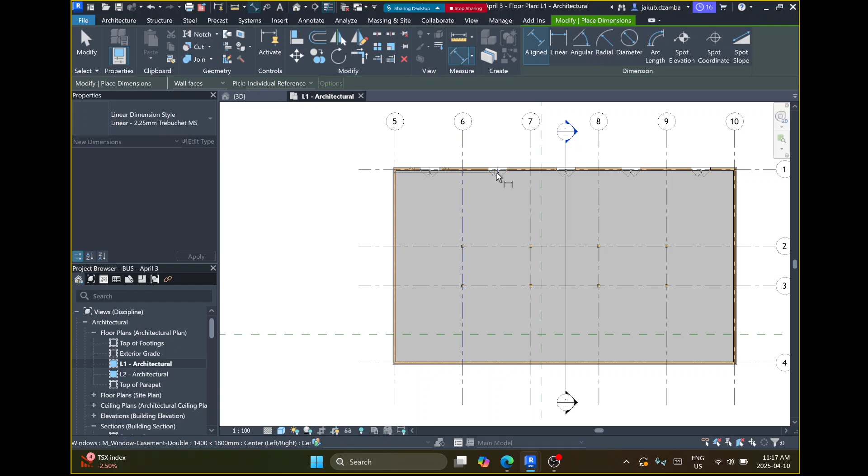That's a very large window, I must say. So 2 meters is not the width. Yeah, 2 meters is the width, I guess. So then, I made 2 meters width, otherwise the distance of the window is... yeah, I know. And did you see the door goes full floor to ceiling? Oh, like it's ridiculous. Okay, we made 2 meters width because this was...

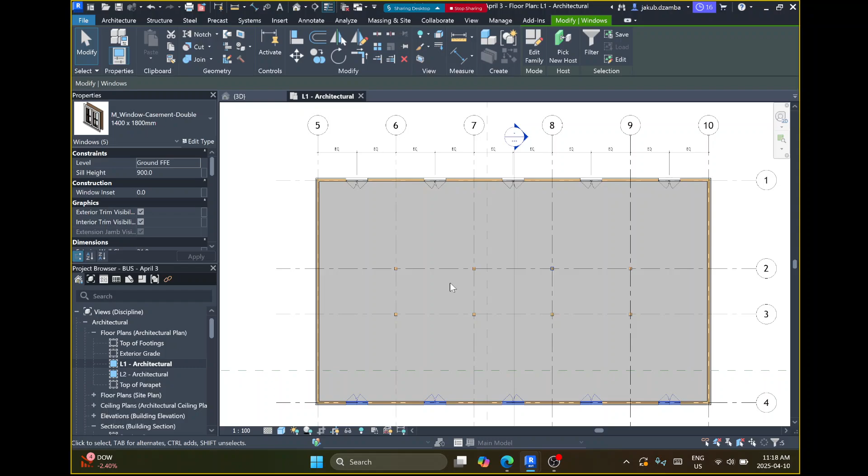The door has a specific measurement though of 2.2. Also, who the fuck just has a square door that is 2.2 meters in both directions? What use is that? You need to move 2 fridges through it simultaneously. And 2 of those doors. 4 fridges. It's like if it was a truck loading dock, that'd be one thing, but it's ground level. That's a fair point.

There's also only 2 windows. So yeah, I'm not sure what you guys have in your layout, so I'm just throwing it random. It says, at your discretion, provide 2 windows, 2 meters by 1.6 meters on the east and west side.

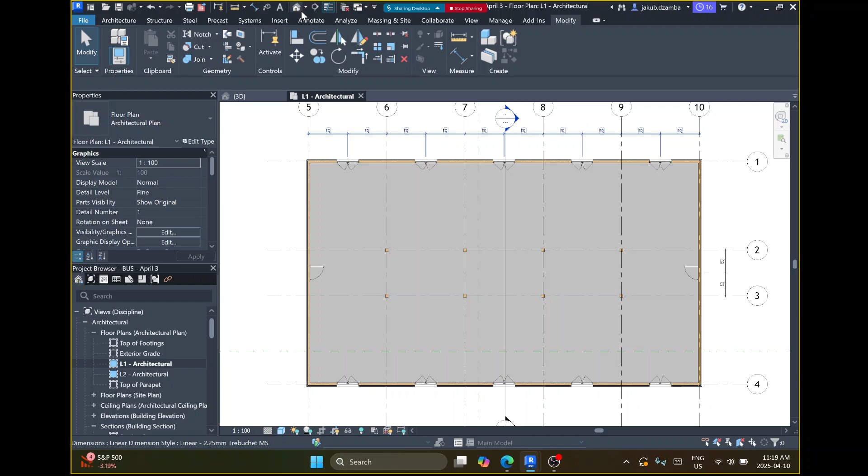Duct, yes. So I think we will hang that at the end. So I think we would hang it off of the bottom of the joists. We would load some kind of metal hanging, some kind of strapping or something like that, and hang the duct every few meters, wherever it needs to be hung under the joist.

But I don't think there's any other room to place it. You can't place it above the joist because your roof is there, and placing it between the joists is fine for any runs going the short way through the building, but you're gonna need to deliver air lengthwise through the building. I don't think you meant like the duct, like a pipe, just take a cut.

Oh, he just wants an opening. So would you like me to show you how to put an opening into the wall? Okay, well I know how to do that. You know how to do it? But like, I made a window this side. Kind of small, I think it's more. Sounds good. If you want, just for— I don't think we actually need a duct, I'm pretty sure it's just the opening. I'm pretty sure we can just shove a hole, shove a fan. Okay, that's just accidental, make something.

Give us a section. So to cut an opening into a wall, I'm just gonna go to an elevation here. East elevation, doesn't really matter which one.

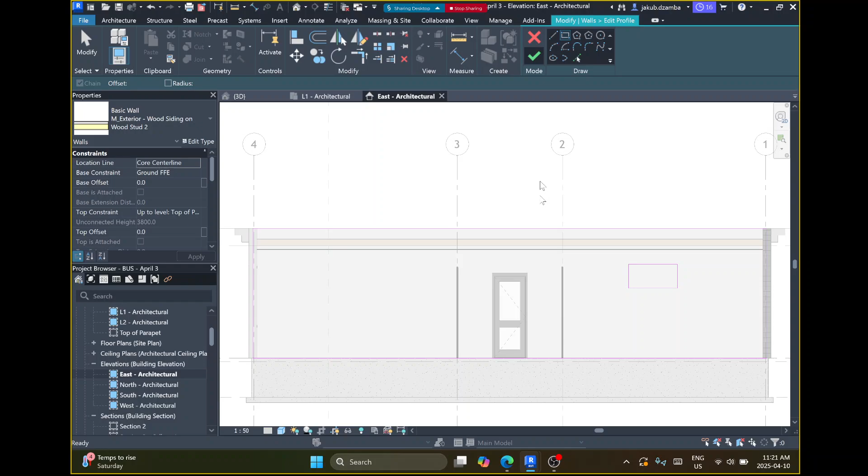I'm going to do 1.4 by 700 millimeters. Hit the check mark, and now I have a cut in my wall. So you can easily do that anytime you want, any shape. You can edit it later just by clicking it. So that's how you can do that.

I know we have a lot of time, but I just don't want to be caught at the end where we can't get it done. So should we move on? Are we okay with openings, doors, windows, and other stuff?

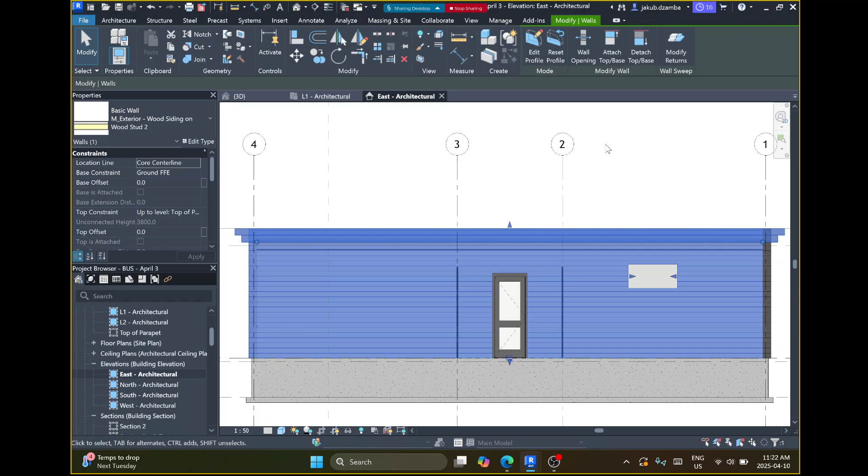Okay, so then let's progress right away to the wall section. Okay, so we're going to focus on doing... let me open it up here.

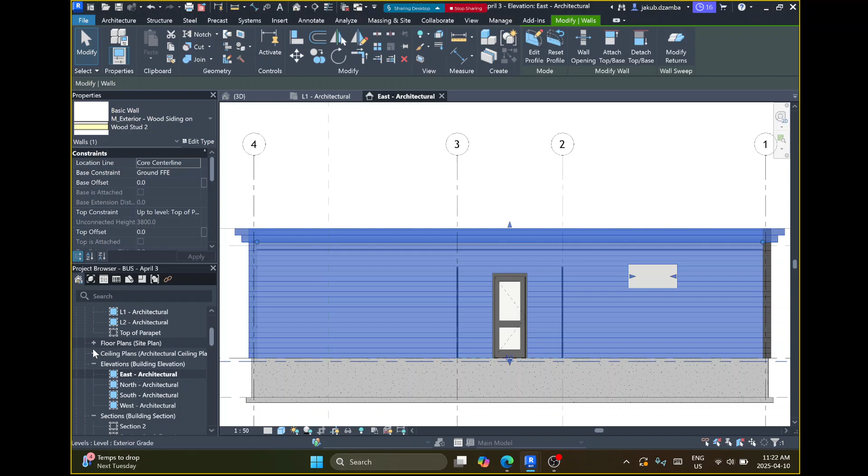Okay, there we go, so we want to get this part done. First step, I'm going to go to my drawing, go to sections, building section, and it's this part of the wall that we want to do.

Now let's say this is gone, I'm going to delete it. That's okay, delete this. Now I want to make a section out of this part, so I need to do a callout here, which will give me a little bit more detail of that part of the building.

What I'll do is go to, I think it's under view, right next to section there's a button called callout. I'll hit the little arrow under it, get a rectangle, and outline what I'd like in my detail or wall section.

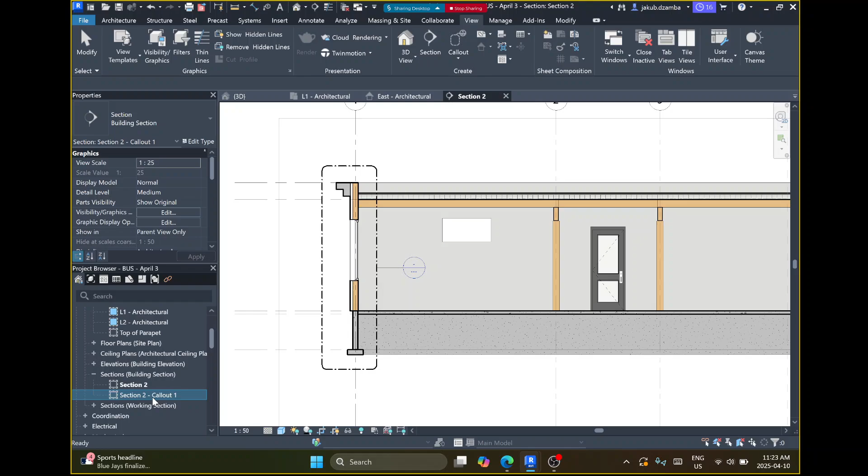As soon as I do that, it makes another tab down under section. I can double click it and get my wall section. Once I'm in here, I can go to fine level of detail, thin lines, all that good stuff.

I'm going to extend my datum lines a little bit just so they're not overlapping, and otherwise this gives us a pretty good start for modeling the rest of it. So let's start—I think we should start at the footing.

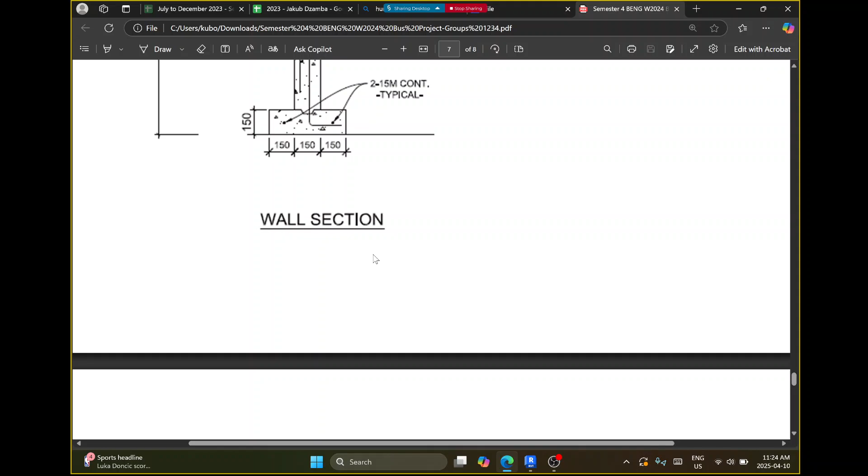Okay, whoa, that's too much. Sorry, there's a bit of lag on this computer. Not what I wanted. Here we go. Yes.

Okay, let's go back to Revit. I'm going to switch to hidden line now so it looks more like the drawing we're trying to create. Let's start really easy—down here we've got a bent line which represents rebar, so let's try adding that first.

I'm going to go to annotate—most of what we're doing now will be in annotate. I'll go to detail line, which is like a mini version of AutoCAD in Revit.

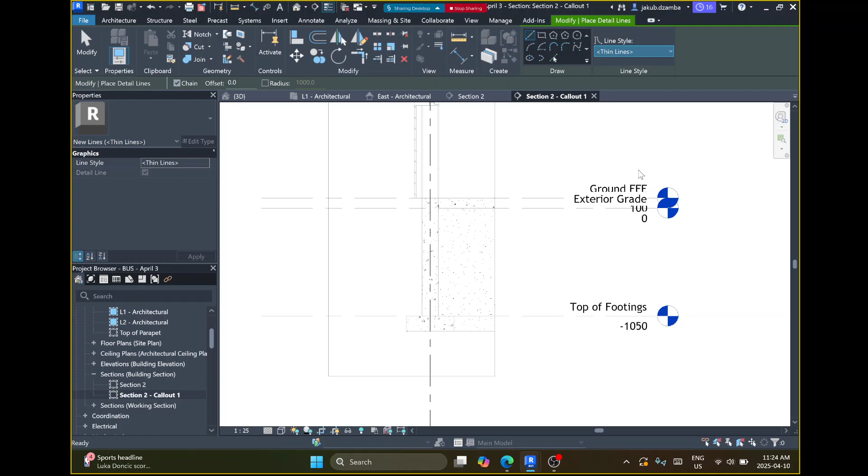So basically here I can click a line, and here I can say what kind of line I want—thin line, I think I want a medium, or is it a wide line? I don't know, you know what, let's take the thin line for now. And I'm just going to draw it from here to here.

That's it, I should be able to give it a fillet of some kind—trim, extend to corner. Okay, we can come back and work that detail out later. There is a fillet, an arc we can do to bend this, but in the interest of getting everything complete this class, we'll do what needs to be done, then come back and add details later.

So we have our rebar line in there, and now I need to point to it and say 2-15M continuous typical. I'm going to go here to annotate text, and grab the text with an elbow—the second one gives me a leader with an elbow. Here I can point on that, come out, come to here, and say 2-15M, something typical, continuous typical. I don't think it's a rebar size.

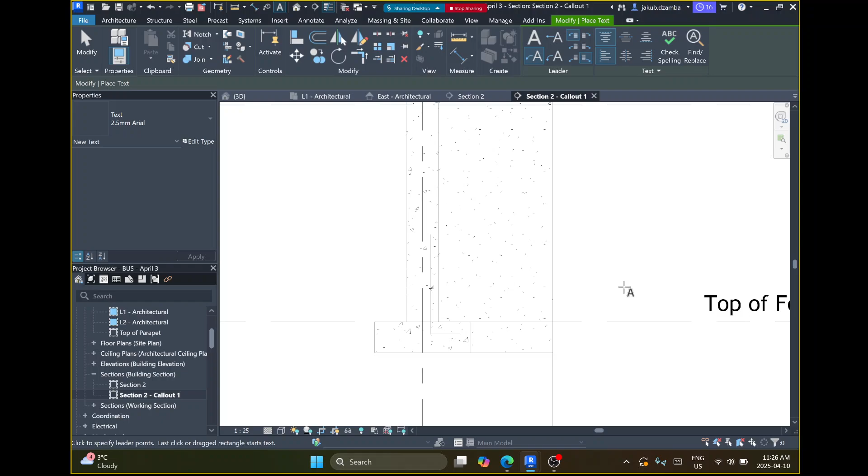That's not a rebar? It's like a metal pipe going inside the tube. Holy smokes, sorry, I guess computers making buildings. Sorry, can you say the comment again? It's just like in the wall section, if you open it from the middle—yes—there's like two metal things, like it goes through.

So I thought these were—so this is a rebar, you're right, there's two circles there as well. I believe this vertical line, this bent, and these two circles just represent rebar going this way. But I believe all of these are rebars, and I'm guessing they're all 15M thickness. Oh no, so here, 15M at 400 vertical, 10M at 300 horizontal, so there are horizontal ones in here as well. Now I'm just going to go back here and see why it's fighting me on placing text.

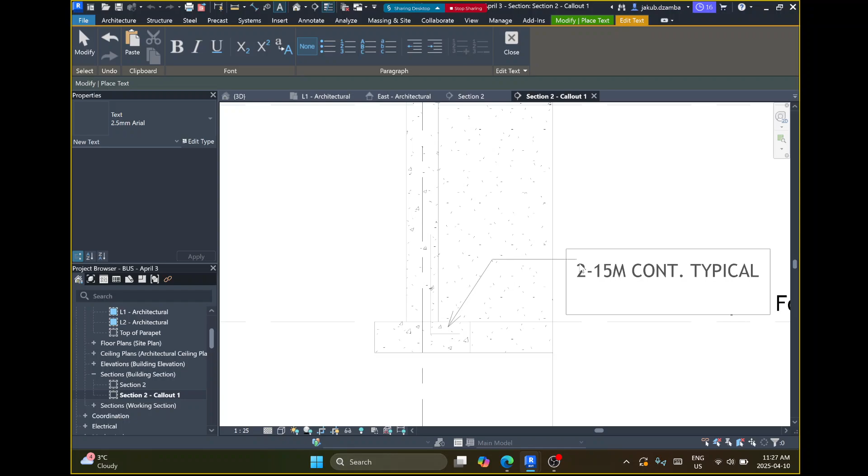Sorry guys, volume. None of the created elements are visible in Section 2 - Callout 1. You may want to check the active view, its parameters and visibility settings.

That's not good. Oh, there it is. I think it just wanted the drawing stretched a little bit more.

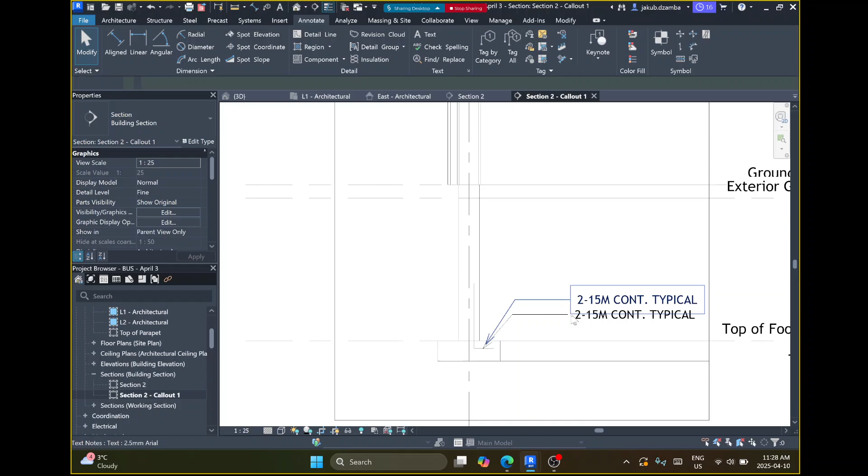Okay, so we have two of the same. I'm going to knock that out. I may want the text a little bit smaller, just so it's easier for us to navigate stuff. Wrong way, 1 to 10, maybe too much. 1 to 20, okay. So I have a line there. Let me just see if I can make it a fat line. That may make it a little bit easier to distinguish.

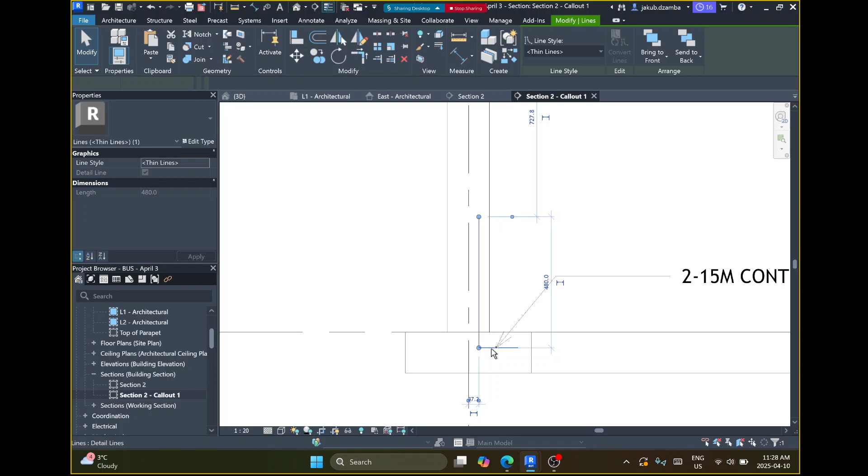There is a medium one option. Is there? Does it show up as such? I don't know how to change it to that. I think right here, so I changed mine to wide line, and it didn't do anything at first. It looked like this, but then I went up here and I turned thin lines off, and then it seems to give you a bit more differentiation. There you go. Yeah, okay.

So we have that, and now kind of more of the same. I'm going to go back to annotate detail line, and here we're kind of eyeballing it. It's okay. The structural drawings will specify specifically where these lines must go, where these rebar must go, so we don't need to be perfectly accurate about it. We're kind of diagramming where they go in.

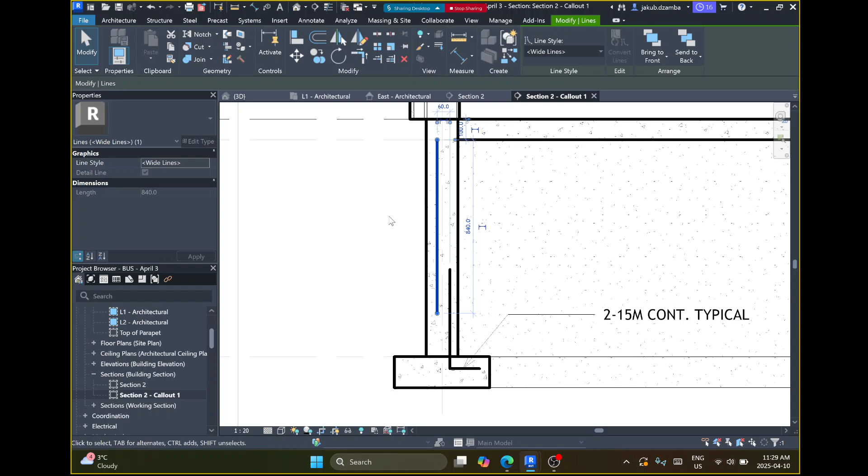We have two going horizontally.

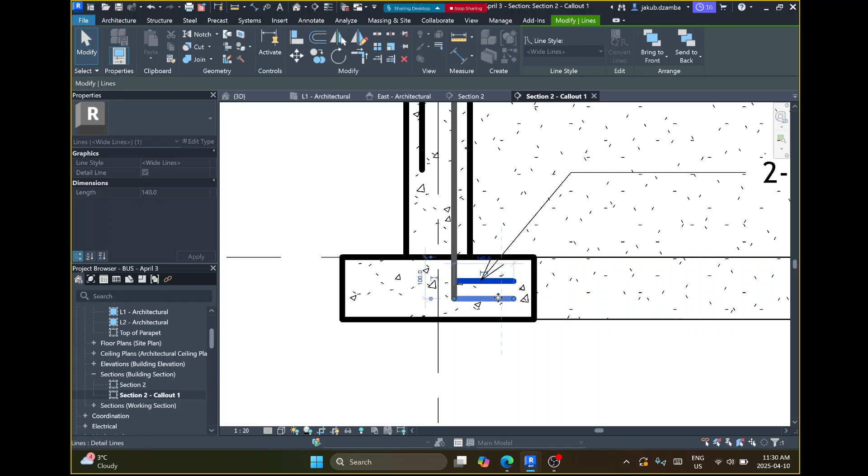Typically, I think if you do rebar, you'd want it at least 2 inches embedded in the concrete. So if you wanted to be very detailed about this, we could make sure this is at least 50 millimeters in and 50 millimeters away from any edge. You want the rebar to be 2 inches. I believe it's 2 inches is the rule of thumb to make sure the concrete has a chance to grip it.

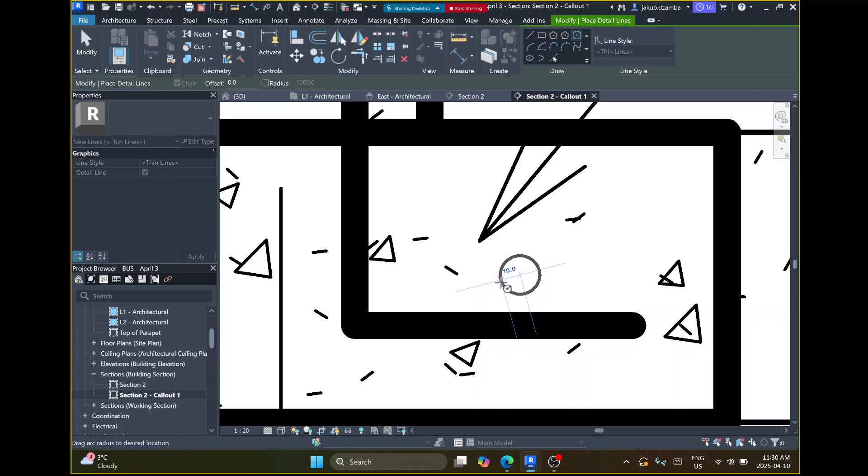And so here I'm going to grab a circle. That's a little bit big. Maybe I'll make it a bit smaller, 5 millimeter radius, and I'll make it a wide line. Okay.

Mirror. We haven't used the mirror button, but I'm just going to flip it to the other side. I'm going to use this button up here called mirror. Pick axis, and I'm going to pick this center line as the axis, and it should have flipped it. There it is.

Lots of angry sounds coming at me from this computer.

1, 2, 3, 4. It looks like they have at 300. Sorry, is it 300? Yeah, 300 millimeter horizontal.

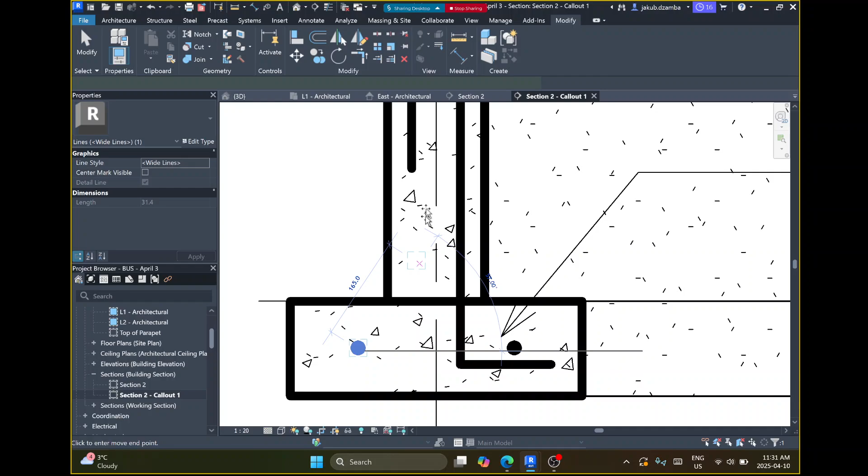So copy, somewhere here. Oh, I just drew it. I went to annotate, detail line, and I did a circle, and I just made it 5 millimeters in radius, because I believe the rebars are 15 millimeters wide, either 10 or 15 millimeters wide. So we're just representing it approximately.

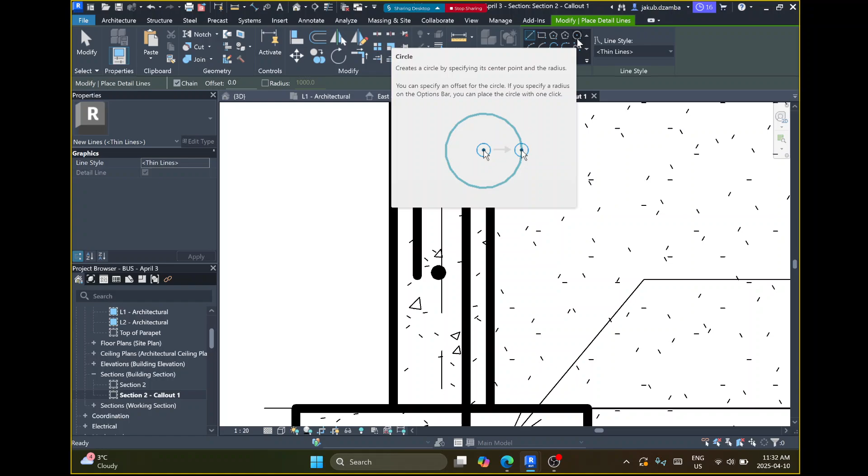Okay. Copy this guy. I'm going to move him 300 up. And 300 up again. And 300 up one more time. And then I can put in the second note, which says 150 foundation concrete wall, 15 at 400, 10 at 300.

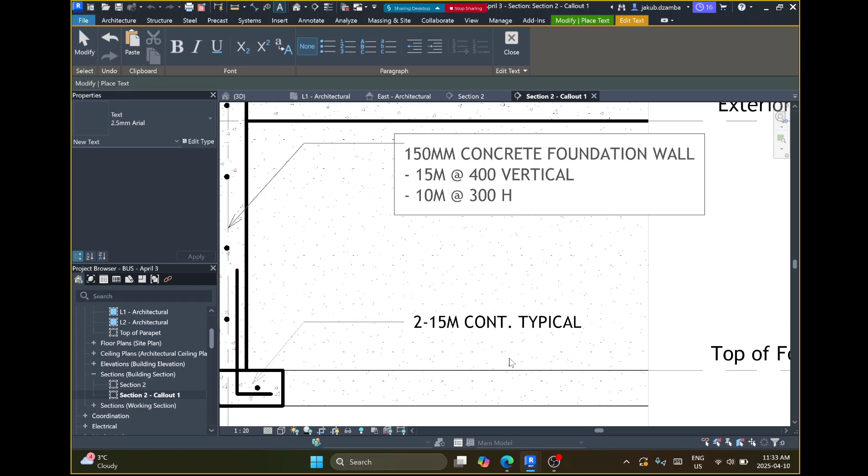How big are you making the circles? I just made them 5 millimeters in radius.

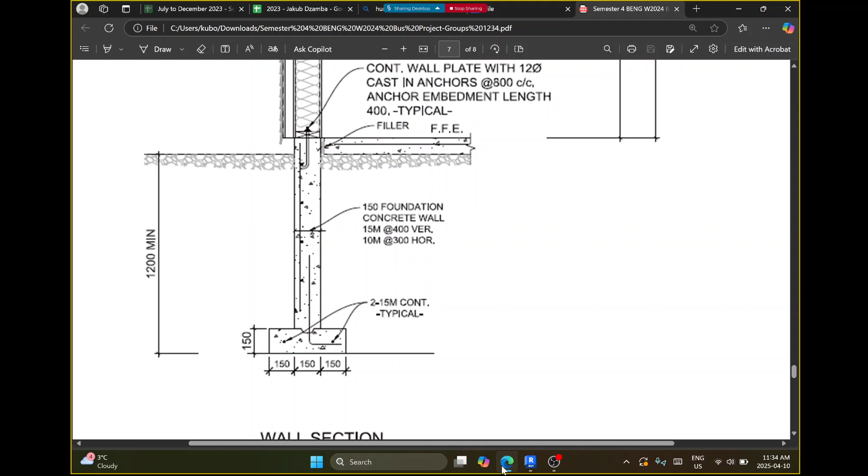No problem. I can walk around and give people a hand. Sorry, I kind of skipped ahead in mine, so if you get stuck on any part, just let me know and I'll head right over.

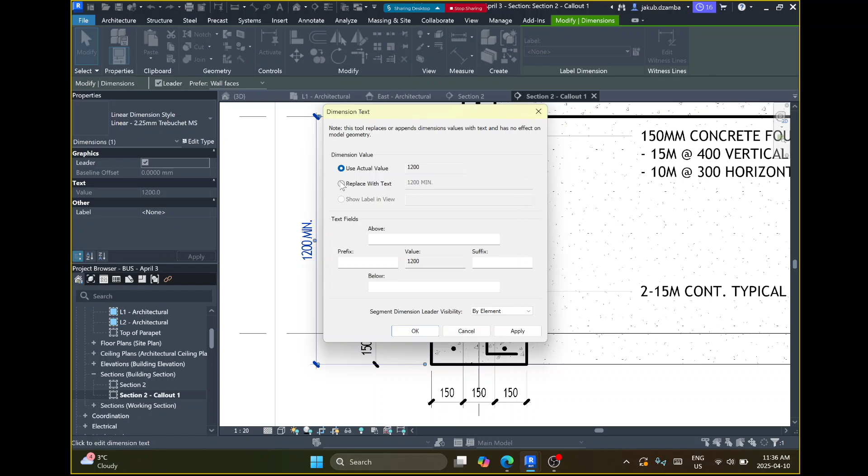Not sure this is coded correctly. Yeah, you got it.

I think if you have 4, you can be confident it's at least 3. But the note would be the thing that captures it more than that - the note would supersede the graphic in this case. So on site, if someone looked at it and thought they were closer together than 300, you would say no, the note says 300 on center.

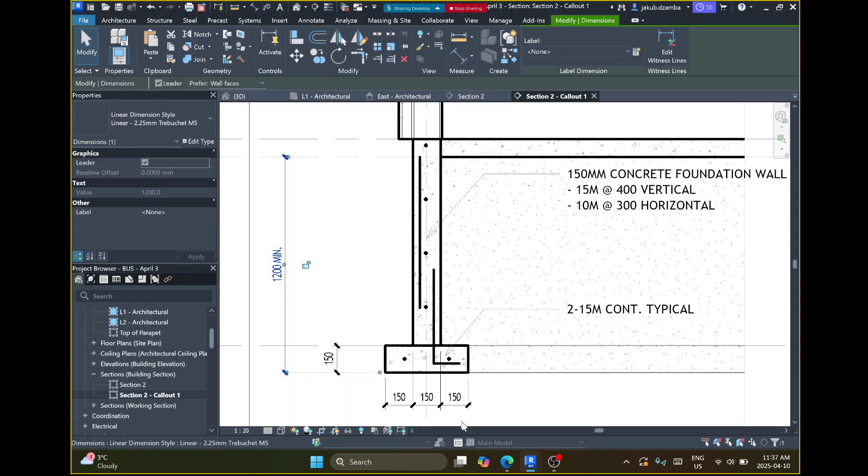Okay, in the interest of staying on schedule, I'm going to press a little bit further ahead. So we have some gravel hatching down here, then we have our floor. And what do we have in our drawing?

So we need to have a line for grade and do some hatching under the floor. They have their grade at 0, 0. So we will go to annotate, detail line. I'm going to make it a wide line - the grade should always be a wide line. So there we go.

And I'm just going to stretch my drawing a little bit to this direction. And now we need to do some hatching. So I think we can do that with the filled region. Just going to give that a try here.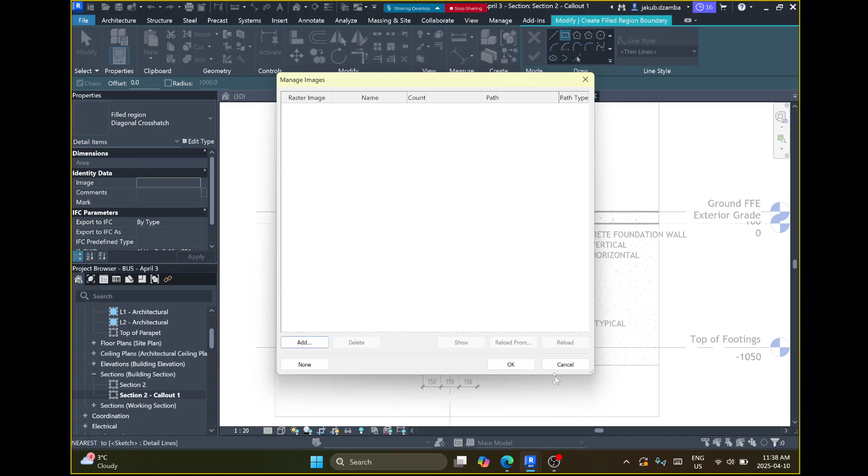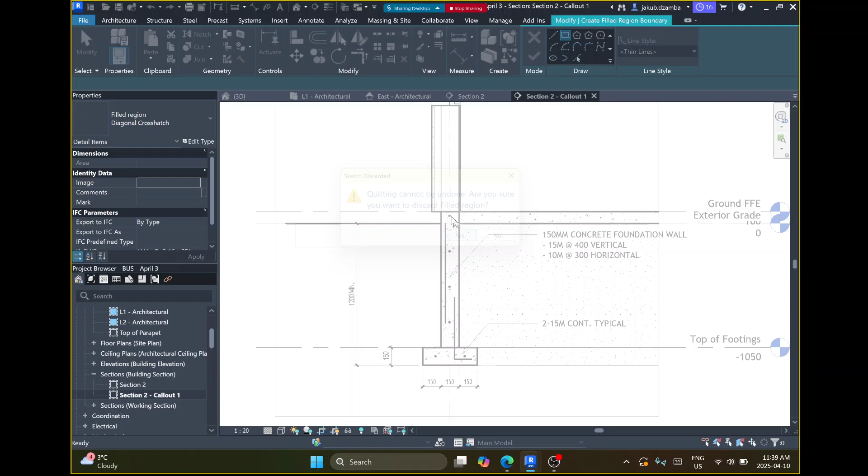Wood, vertical, horizontal, diagonal, up. So I'm on my laptop, I don't have all of the options, but if you guys can let me know. I'll do this command again in case you didn't see how I did it. I went to annotate, region, fill region, and then I grabbed a rectangle because I need to define the region I want to fill.

I'm just going to pick a layer here. And up here, it should let me pick what I want to put into there. Now, I don't have the gravel hatch, so I did diagonal lines down, which is not correct. But on your computer, I'm just wondering if you have it. Do you have gravel?

Edit. I didn't, I just have the diagonal hatch. So I'm just trying to modify it now. How did I get that? I think I know how to fix it, by the way. Okay, I'm going to delete this and I'll do it one more time.

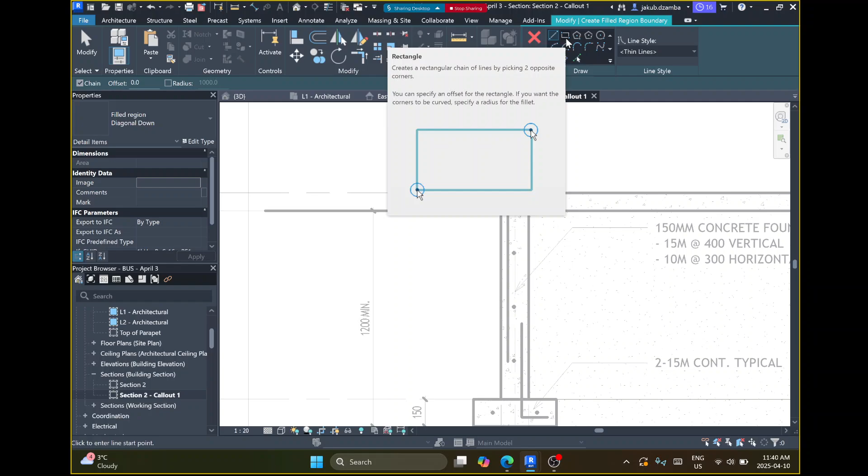So region, sorry, annotate, region, hit the little arrow, filled region. So far so good? My drop downs are different than yours. Oh sorry, well I think you logged in, you can press insert and then from the cloud you can download the file. Are you okay? Did you find it? No, it's now stuck.

So I think I suspect there might be a few more options here, let me give it a try. So filled region, rectangle, there we go. Edit type. And I think in here they give us more, but I don't see... oh I do see, I see concrete. Come on, gravel.

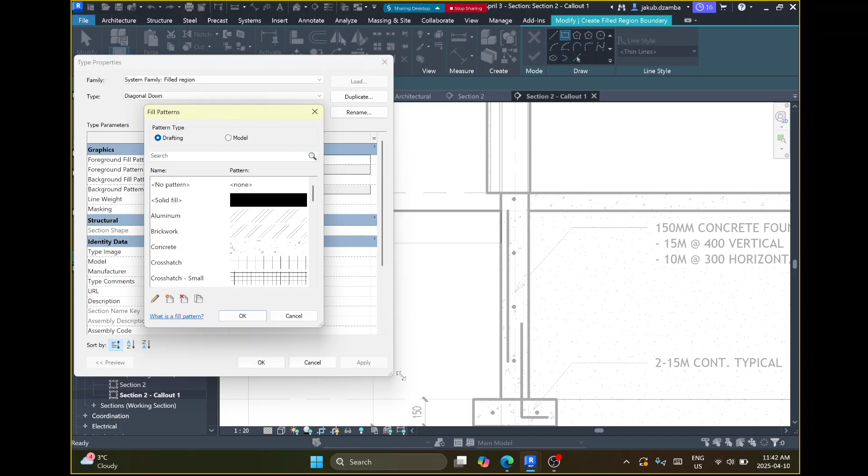Would sand be correct? You may have to go with that. Why do they have gravel on the outside? Hold on, that's not supposed to be gravel, it's supposed to be earth. Okay, so what we're going to do right now is plug in earth because I'm going to make a decision, and I'm not going to follow the drawing that they're showing us in one way. This out here should not be gravel unless you have that in your design. Most likely what they meant is earth. So we're going to fill this part with the earth hatch.

And later on, if we have time, we will come back and throw in a gravel hatch down here. But I don't think it's the end of the world if you don't put it there. We can always load that later on using the same method. So I'm going to go to earth, apply, okay, and hit the check mark, and I'll see what it gives me. Not bad. I may want to rotate it - typically you would rotate it 45 degrees.

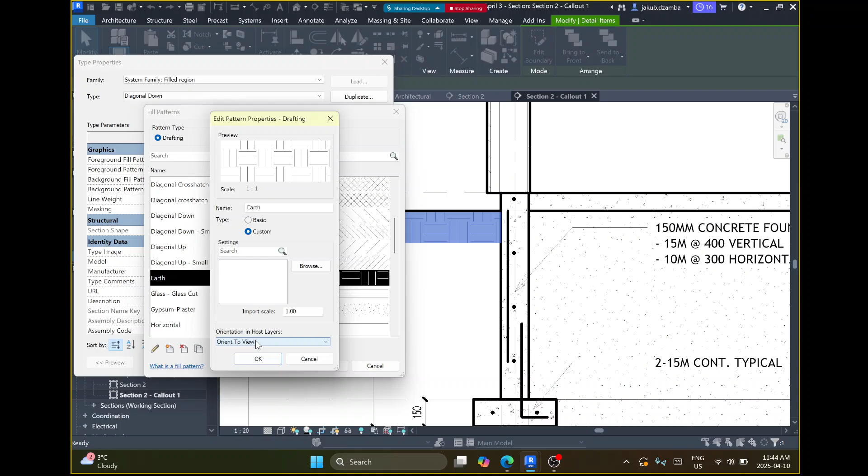So I'm just going to go back into here. Doesn't give me the option. Maybe it does, edit. No. Orient to view, import scale. For the inside one, do we use the sand? Sure, you can use sand. Sand dense or just sand? Sorry, sand dense or sand? Yeah, there's two options for sand, either one is fine.

Okay, so we have our earth in there. There will be a way, I'm not sure exactly where. Let me actually use the side menu to rotate it. I changed one and it changed the other. I'm not seeing it.

Okay, so I'm going to leave my earth hatch the way it is now. This is a relatively minor issue that I think we can leave as is, and we can work it out later if there's time. So we have our earth hatch, and I'm going to add a few annotations.

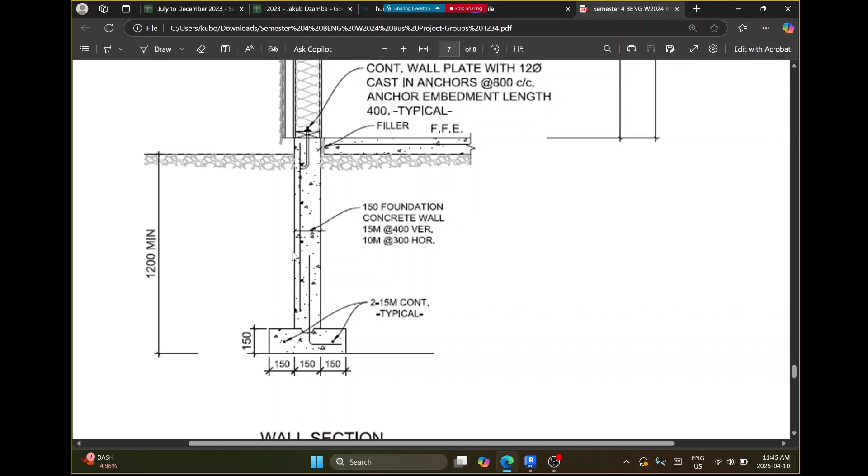Oh no, we need a bit more detail here. So we need our filler, and then we need our J-bolt.

So I'm going to zoom into here. This is where they want us to put a little filler foam ribbon. I'm going to go to annotate. The way we would draw that is literally just drawing a very small rectangle. There's not room for more detail in this scale of a drawing.

So I'm going to go wide line. Somewhere in here, just draw a rectangle. That's it. And then I'm going to add a note indicating that it's filler.

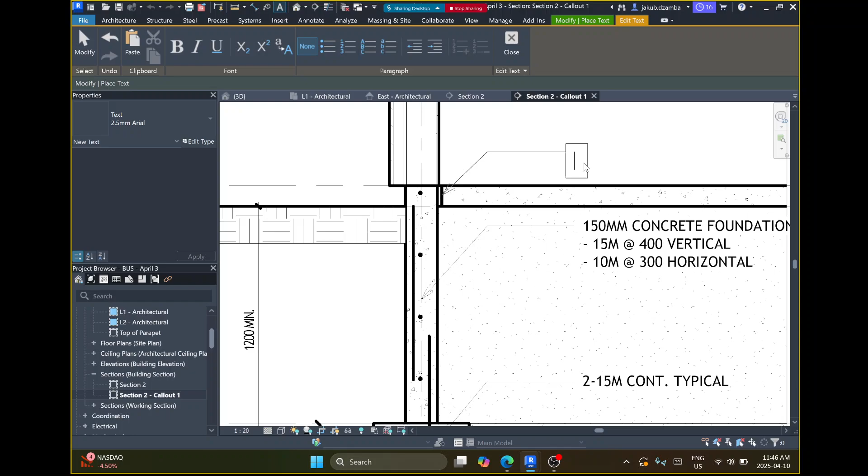You could just type filler the way they did, or you could say foam separator. Separator. I'm not sure if I spelled that right.

Okay, next, so here we get into the actual structure. So here we need to switch from the concrete footing to the wood structure above. And it doesn't seem like a complicated detail, but this is how you would switch from concrete to wood.

In the concrete, when it's wet, you embed this thing called a J-bolt or an anchor bolt, people call it different things. It's a bent, long bolt, about that long, that sticks out of the concrete, exactly in the middle, and at the top it has a thread for you to put a washer and bolt on. And once that's hardened in, you take your 2x6 or whatever you have.

In this case I believe it's 2x6, yeah, 140, and you drill a hole through the 2x6, you line up those holes exactly where those bolts are, which you find by putting the 2x6 over top of the bolts, and you whack it with a hammer everywhere there's a bolt, so it indents it from the bottom. Then you have a template where to drill, and the holes perfectly line up.

You sink it on that, and you put a big washer, so it grips it across a large area, and you tighten the bolt onto there. And now you have a very hard mounted piece of wood on top of the concrete. And now from wood to wood, it's easy. You can nail, screw, whatever you need.

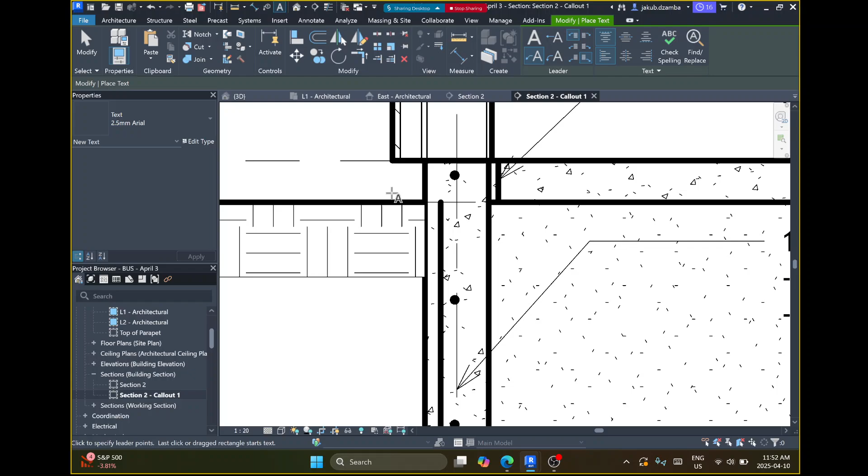Okay, so we have our J-bolt. Before we draw our J-bolt, wrong keyboard, okay. Before we draw our J-bolt, I'm gonna go down to the top of the concrete footing and draw my 2x6 in sections. So I'm gonna say annotate, detail line.

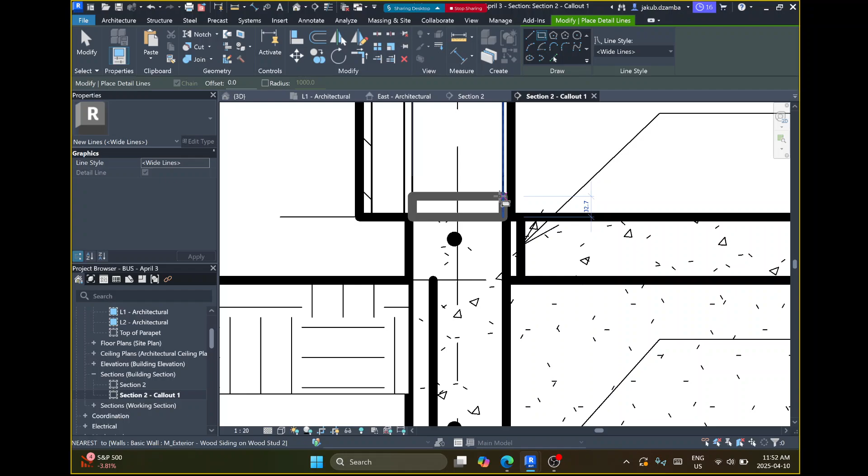Rectangle, draw this guy, and now I'm gonna click it. I think I'm gonna go to thin lines here for a second. And I want this to be 38 millimeters up. And then I want to create an X on it to represent that it's a cut through. This is a section through that piece of lumber.

Once I have that, I can draw the J-bolt. And I'm just gonna guess here, they come in all shapes and sizes. You don't have to be too precise, but I'm gonna start somewhere up here. Let's say 50 millimeters, that's a lot. 40 millimeters above the wood.

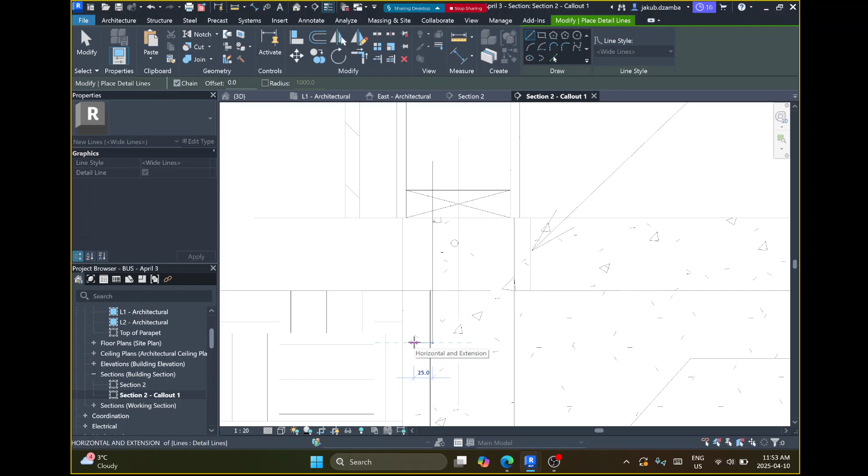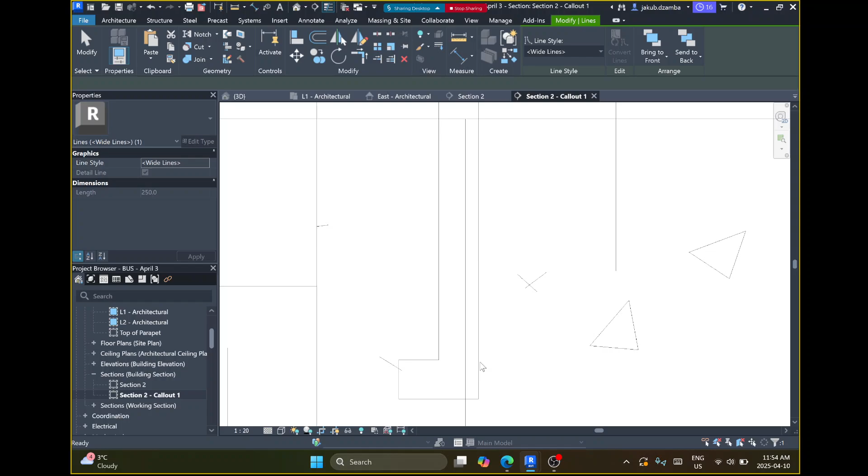And I'm gonna go down 250. 25 centimeters, sure, even 300 is okay, but 250 is fine. And then to the right or to the left, I'm gonna go 20. And I'll make this thing 10 thick. Okay, there's our J-bolt, and if I want, I can draw a nut on it.

And I'm just going to say it's about yay big. If you want, you can be precise and draw it symmetrically, but isn't that a little extra? It could be extra. They do sort of show it, but you don't have to, right? Like this is a superficial detail. No one's going to care, so you can literally just leave it as a bent line, done, and then we capture it in the note.

That would actually be the most efficient way. If I was teaching a drafting class right now, I'm just not sure how much detail you guys need for your other teachers, for your structural teachers, but if this was an architectural drafting class, which is where we would be drawing this, I would not draw the nut. I would draw a bent line about 250, 300 millimeters down with a hook at the end, and then I would simply copy this note and we move on.

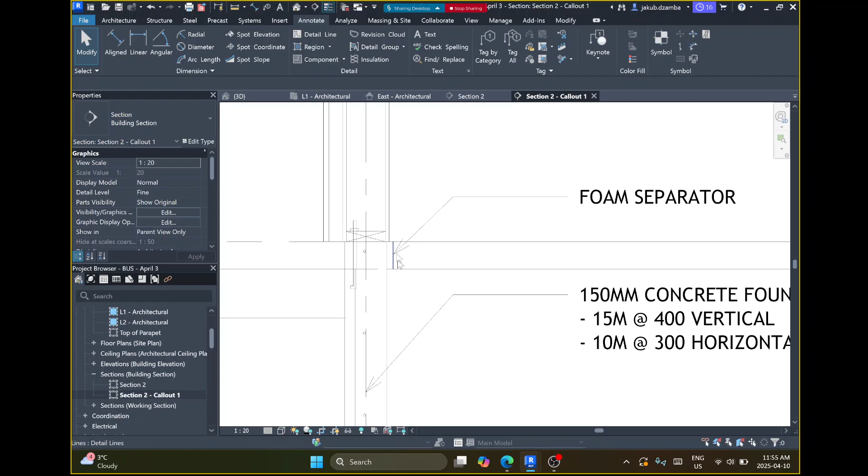I think I'm just going to switch to thin lines from now on because it's getting a bit busy with the thick lines. I'm not a fan of how that looks, and it's just going to get more busy. So for now I'm going to switch to thin lines, and I may leave it on that.

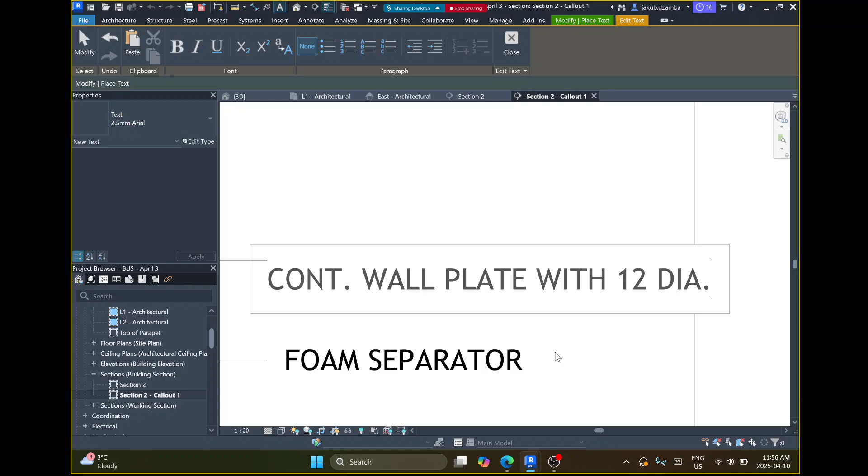Another note somewhere here: continuous wall plate with 12 diameter cast-in anchors. Forget the symbol for diameter, I'm just going to do diameter, cast in anchors. If it gets too far, just hit enter and you can start a new line.

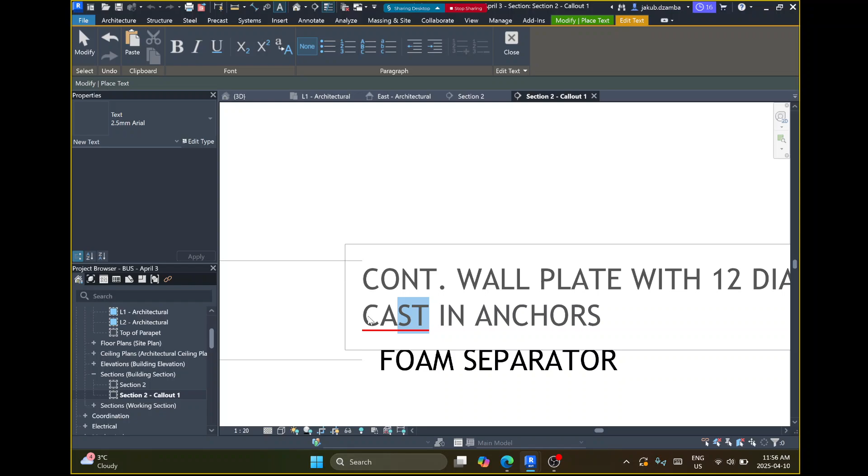At 800 on center, CC, center to center. Anchor embedment length 400... length 400 typical. There, and I'll just pull this note up a little bit because it's getting in the way.

Something like that. So to draw the anchor, I just went to a detail line and I just drew it as a hook. Like literally a line 300 millimeters down and then a line 50 millimeters or 25 to the left.

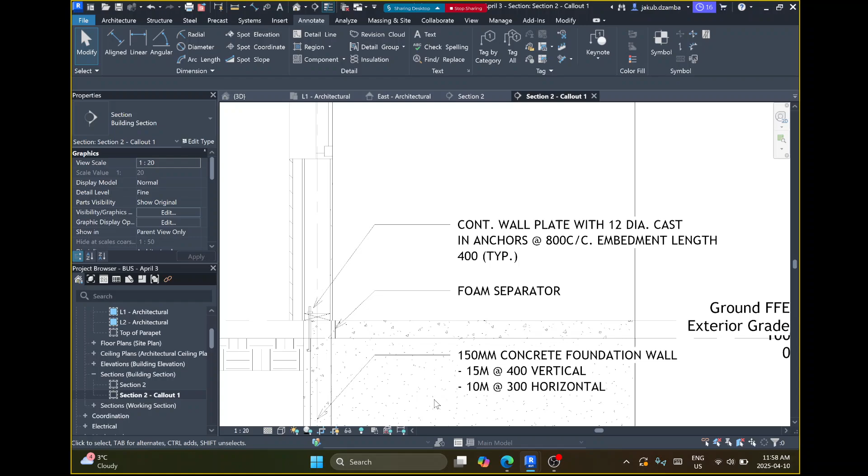300 is very large. Okay, so 250, or maybe it says... I feel like 300 is going down much farther than it says, 400, length 400 typical, but theirs is not 400 long, clearly. Just, yeah, I mean it's literally a symbol, so it's okay. You can draw it any length you want, as long as this note is in place. This note is what they must refer to on site, or sorry, in terms of construction. Are we okay with these notes at the bottom?

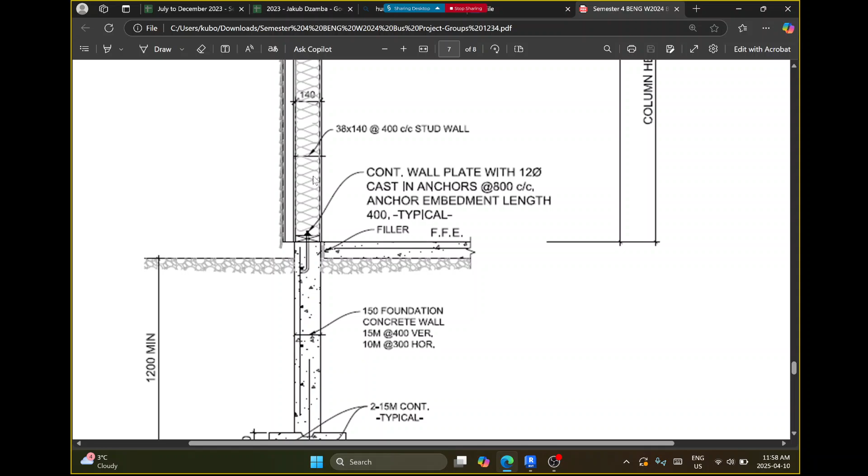Okay, so now we get to the wall itself. I'm going to zoom out just a tiny bit. We're done with the footing, and we need to throw a chunk of insulation in up to the bottom of the first joist.

So I'm going to go back to my Revit drawing. And I have a window going through mine. Does anyone else have a window in their section? Good, so to simplify it, I'm going to delete that, that makes our life a lot easier. But I do need, this is the bottom of our joist.

And so here we're going to run into a little issue because on the drawing, the 2x6s stop here. Okay, they stop a little bit below the vertical pieces of wood, and then there's a horizontal piece of wood that goes across it called a top plate. Now in your drawing, I think they actually made a little mistake. Yeah, okay, we're going to draw it the way it is in the drawing, but in real life I believe you would have a double plate up here.

Top plate is usually 2 pieces, and the reason for that is because it sort of ties all of the vertical pieces together. These 2x6s don't come in infinite length, so at some point you're going to have 2 butt joints of a 2x6 that you cannot connect together. That's why you want an overlapping piece over top, so you want overlapping 2x6s at the top. Usually there's 2, I'm going to draw it just as 1.

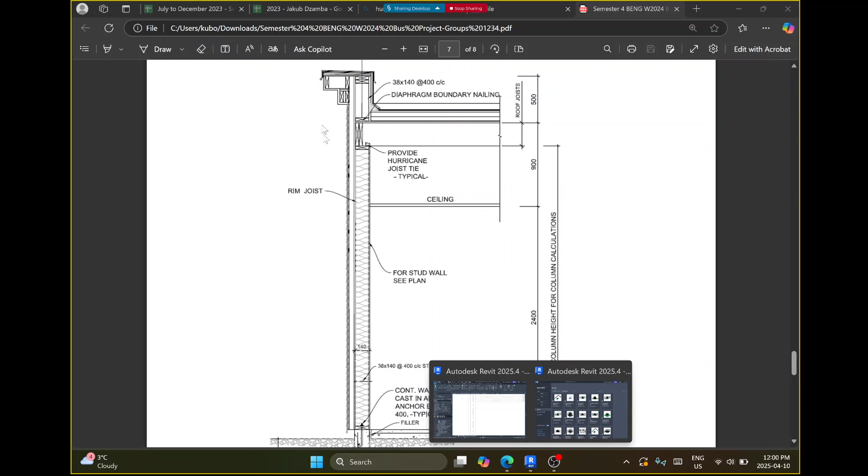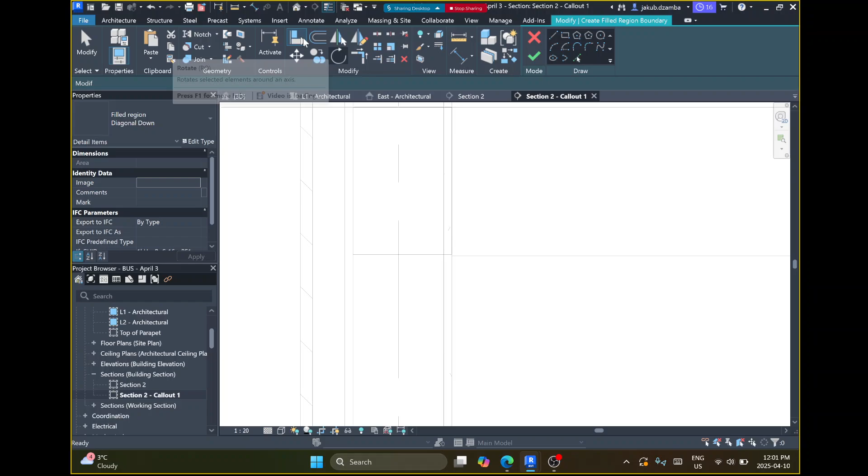So we need to basically go in here and say region, filled region, and now I'm going to draw a rectangle from here to the outer wall here. And I'm going to first align it, align from here to here. Good, and then I should be able to fill this region.

Hope. Oh, check mark, okay, not with soil, but with just a white fill. Just a moment. Solid fill, hit OK, fill color white.

That's what I want, but I also don't want an outline on it. I wonder if I can get rid of that. Fill background line weight, can I switch to 0? No. Masking. Nope, that didn't work.

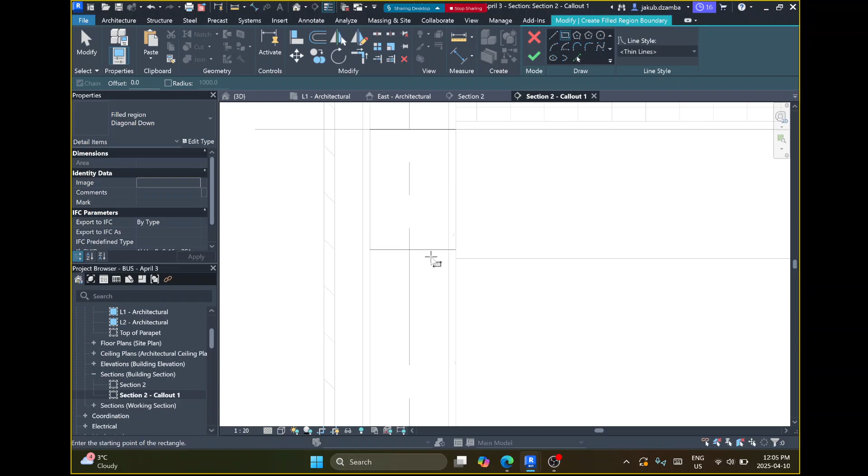So I'm gonna go to Annotate, Region, Filled Region, and align it to the bottom of the joist.

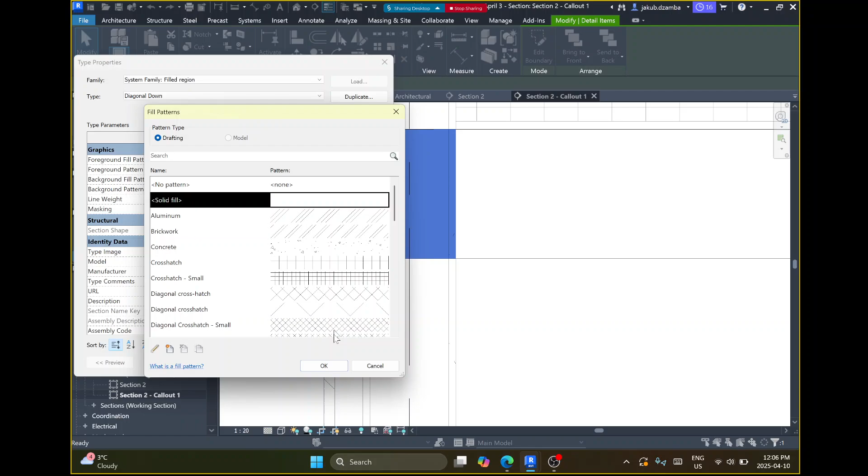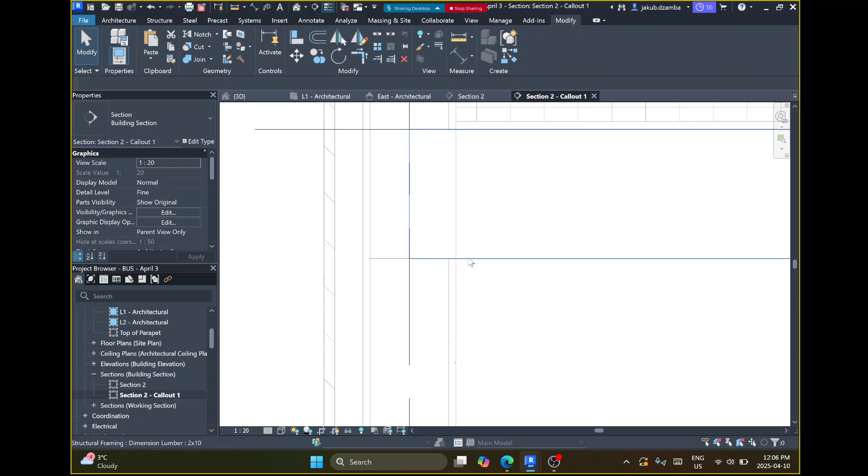No, that's not even working. Okay, so we have our stuff blocked out. We're going up to the top of our joist here.

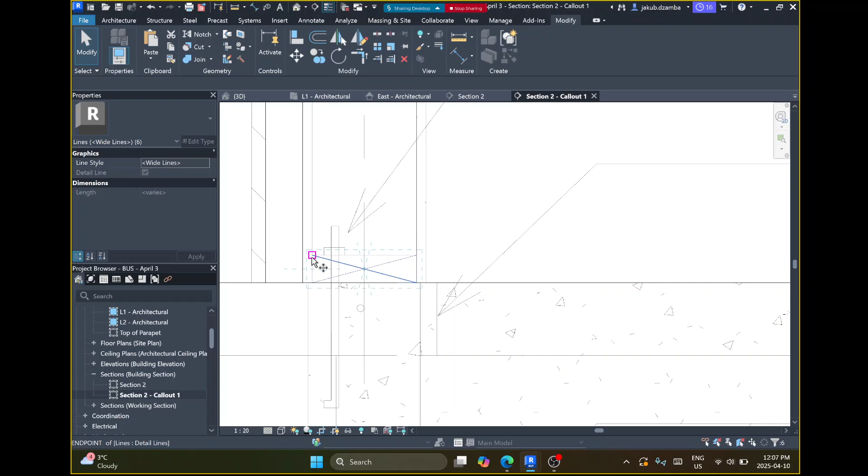And so now underneath that, we need to do a 2x6 box with an X through it. I can draw that, or I can simply come down and copy what I have here, clicking these lines while holding down Control. Okay, I hit copy, I pick a base point, and I move it under my joist.

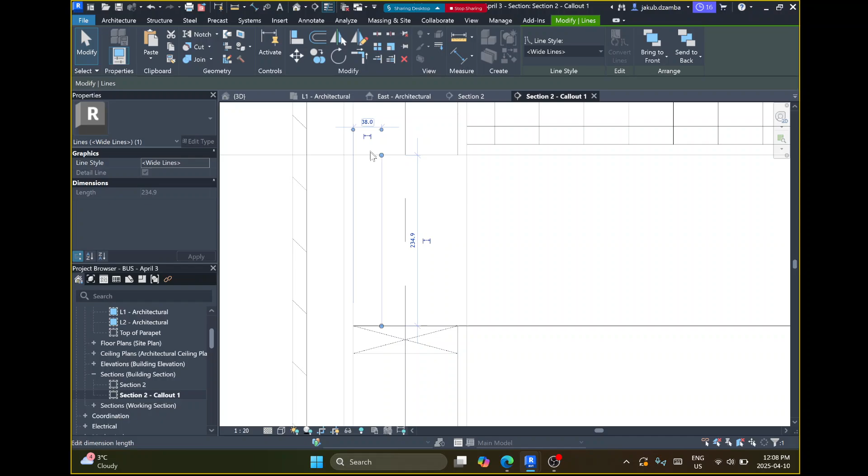Right there. Now I need to do that twice more, so I'm going to go to Annotate, Detail Line. I'm going to draw a line from top to bottom, and make sure I space it 38 millimeters away from the edge. And I'll copy it - actually, before I copy it, I'll put in the X.

Now I'll copy these three lines, move them 38 over again, and now I have that.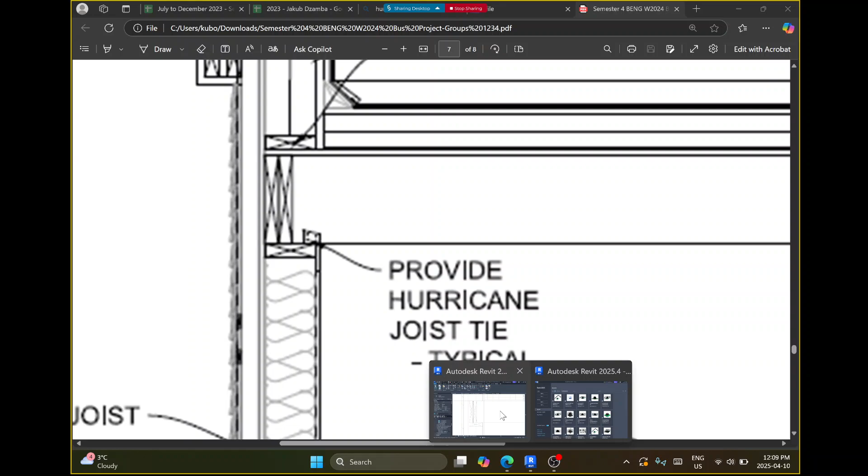All that stuff is routing.

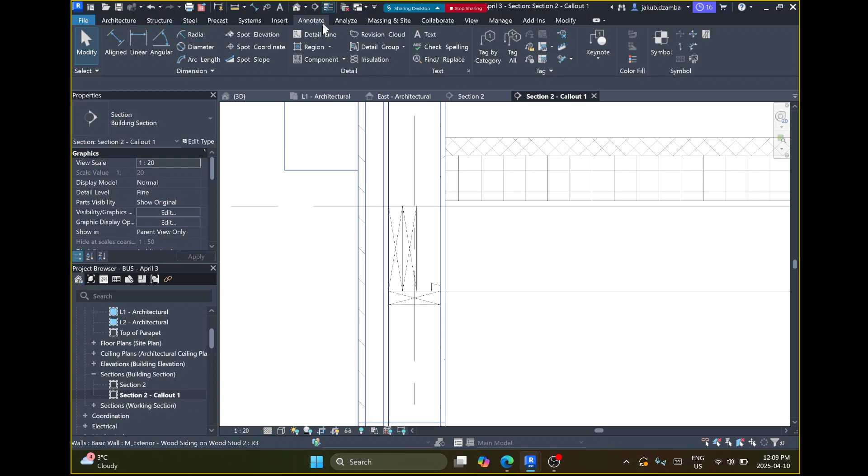Provide hurricane joist tie, typical.

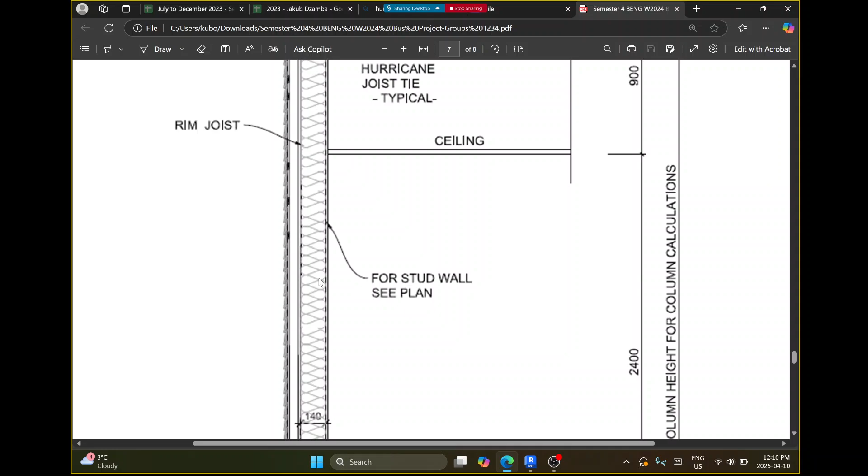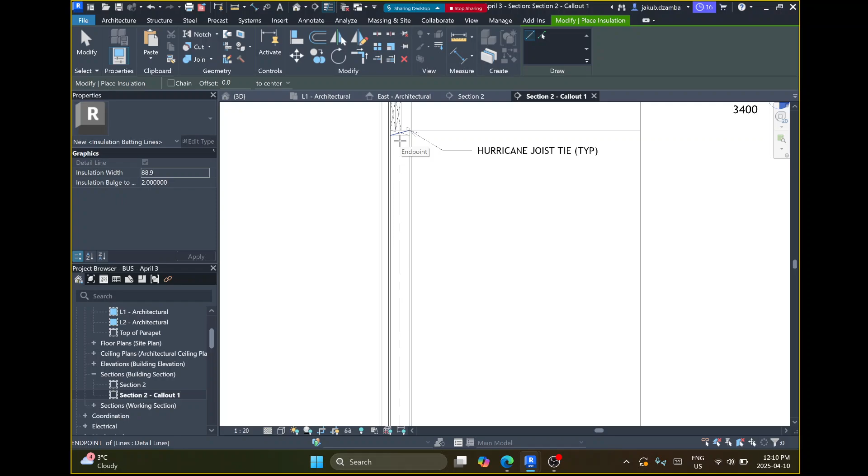Okay, so we have the top of our wall now. We've defined that, and so now we can add in a little bit more detail. I'm going to throw in the insulation line for starters. The way I can do that is I come up here, I click insulation, and I just start at the top center, go to the bottom center, hit escape, I click on the insulation, and then it should ask me for...

Oh boy, it should say how thick do you want it. There it is, and I'm going to say give me 140, same width as the studs. I believe they threw in a dimension, Annotate, Aligned, somewhere in here they're showing 140, I think. Yeah, they show us the width of this wall.

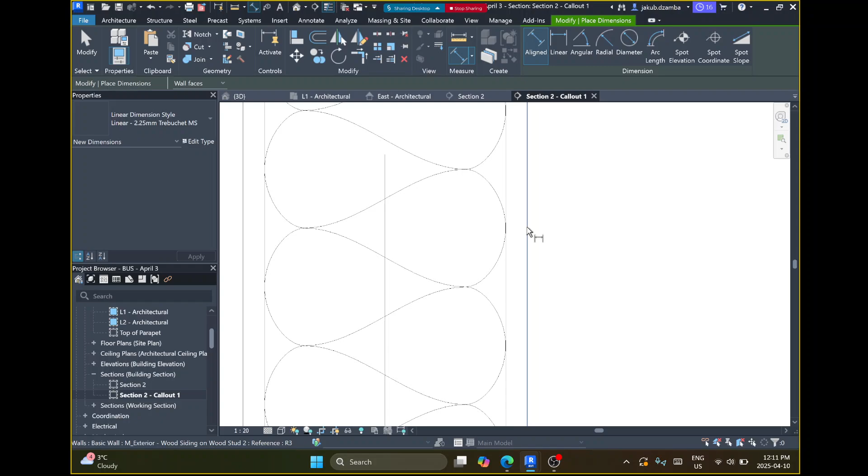My snap isn't allowing me to do that, which is weird. I wonder if I can modify it after the fact. No. Okay, so I will have to figure out how to add that dimension later.

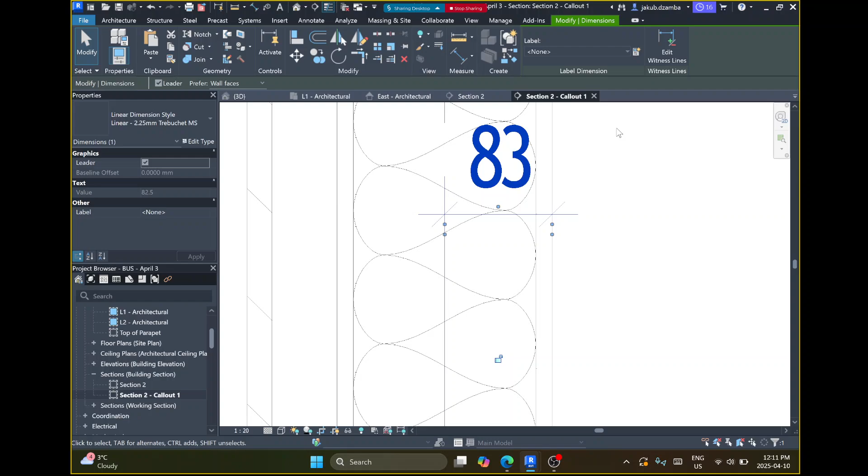I have a few things that I need to update: how to get rid of the line on our fill, how to add that dimension. So I will follow up with these little fixes, but switch to figuring out how to put beams for the sidewalls, beams for the sidewalls.

Yeah, what do you mean? Like, not beams, the studs and stuff. Oh, the 3D modeling of the studs. Yes, okay, actually we could.

So to finish this drawing, it's more of the same. We're putting in more of these rectangles, as you can see, a couple more lines, couple of dimensions. Do you guys feel comfortable finishing this with the tools that I've demonstrated? Okay, awesome. So I'm gonna save this and we can move on to the studs - gotta place all of our windows and doors first.

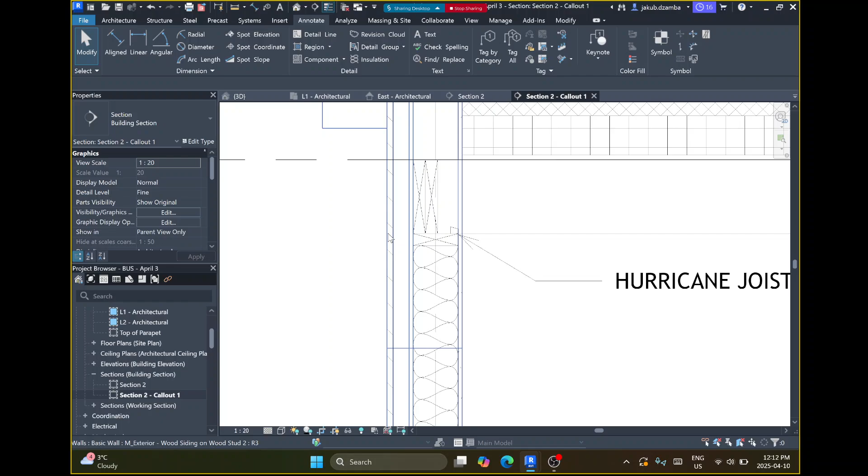Okay, so let's go to the 3D view. I'm gonna save what I have, and then I'm gonna save as another drawing. Save as project, because you can do your renderings or whatever you need off of this drawing. Have you changed your directions?

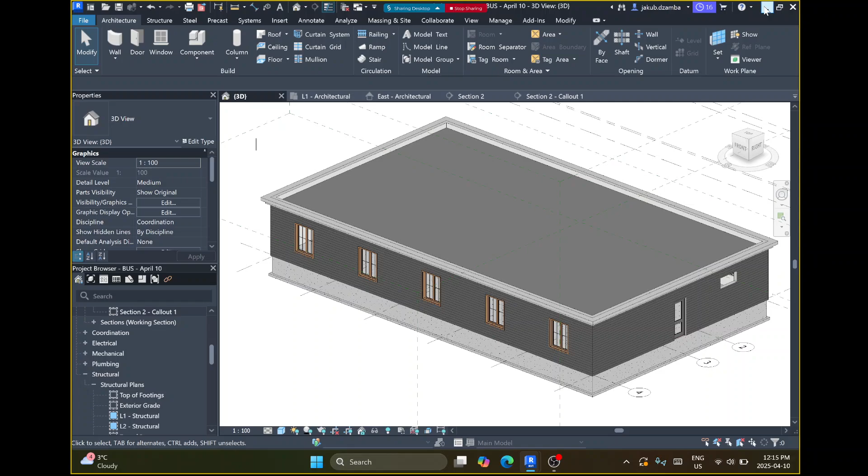Okay, I think I'm gonna have to switch to the main computer to do the lumber stuff because I don't have those parts loaded and I don't want to slow down to download them right now on my computer. So I'm going to switch to the school computer and I'll re-record the rest of this.